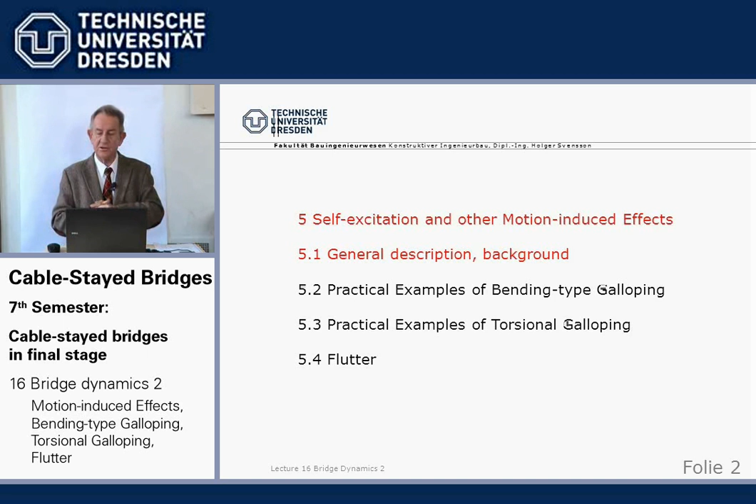Our third part of phenomena, which is the self-excitation or motion-induced effects. Again, we have this important table showing the three different. Now, the motion-induced, we have rhythmic motion of the body in the flow. It's together. The beam moves, acts together with the surrounding air. It's a combined system, air plus beam. That's the difference to the other two before.

And okay, it can be vertical and rotational. Rotational is very important here. And basically, we have the effect of self-excitation instability. And you may always remember that we have here something like a buckling problem in general statics. We have an Euler case 1 where we can have a sudden divergence, Verzweigungsproblem in here, which goes beyond limits and destroys the bridge.

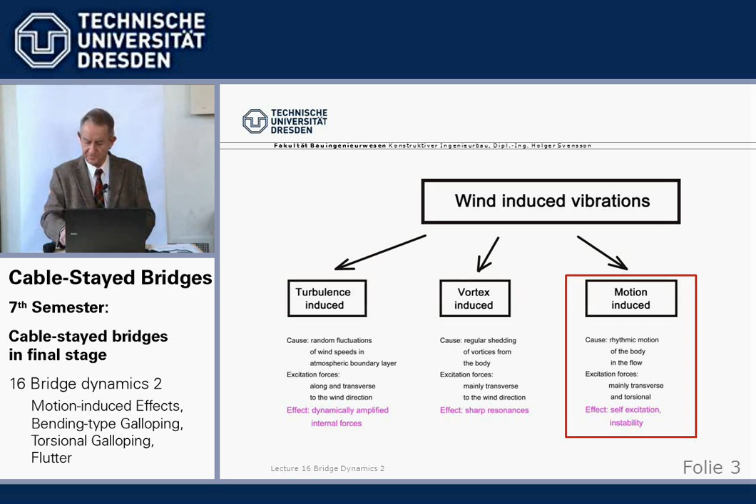This is the second, I would like to say, very important picture I'm showing you and trying to explain. Because here, I think in an excellent way, the different phenomena are explained. First of all, the interaction of the air with the beam changes certain characteristics of the beam. Now, the wind force may act as a torsional spring.

We can think of the surrounding air as a torsional spring, which with increasing wind speed changes the torsional eigenfrequency of the beam. If we have at wind speed 0 this torsional eigenfrequency, and the wind increases, and we have a cross-section which is sensitive, of course it depends on the cross-section, then the torsional frequency with increasing wind goes down, goes down. Here we start in a ratio, torsional frequency twice the bending frequency. You see? Bending, torsional. And we come to a point where they are identical.

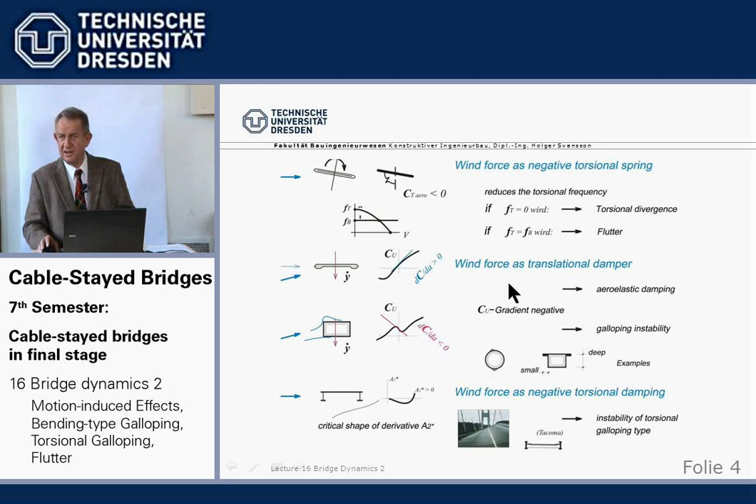Now, I mentioned already self-excitation or divergence on the dynamic behavior. We have here a similarity from buckling problem, suddenly a divergence, Verzweigungsproblem, or if we have an eccentric compression, then we don't have divergence, but we have nonlinear theory of second order increase of stresses. And we have the same here. Under constant laminar wind, in reality, we have a bifurcation, which is again another word for Verzweigung problem. Suddenly the movement goes beyond all limits.

Or if we have turbulent wind, not like beautiful and parallel, but like true wind is, then we don't have this divergence or bifurcation, but we just have secondary effects on section forces like buckling problem and stress problem. Instability, we have here the bifurcation problem in laminar wind and the secondary in turbulent wind.

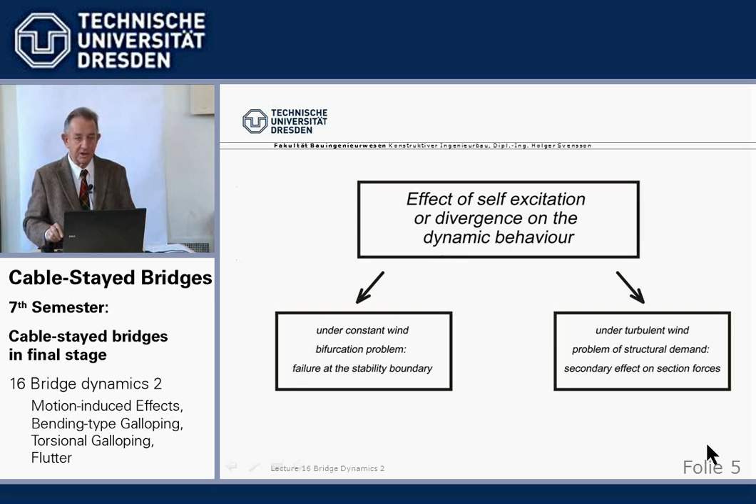It's always a question, of course, what is the required relation between wind on site and the onset wind speed for, say, flutter. This depends, the wind speed shown here depends on the angle of attack.

For horizontal wind, the wind speed in nature is biggest at roughly this angle, speaking very roughly. If the angle increases, the highest wind speed decreases. And in actual fact, the wind speed decreases faster than the critical wind speed for flutter. So we can rest assured, if we have safety here, it will not be worse for angles acting in general.

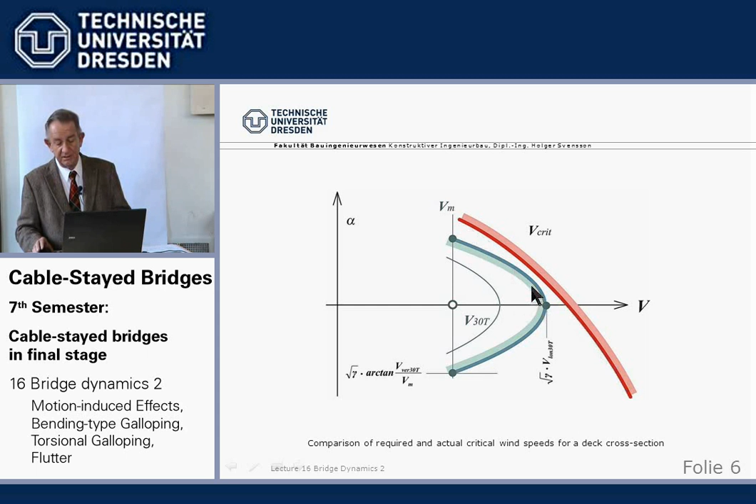Then naturally we have to multiply our certain wind speed. Normally we take the wind speed for oscillations in the wind with some ultimate factor. Normally for wind pressure we go by 1.5. Then the wind speed is the square root of 1.5, because the pressure goes with the square of the wind speed. So if that's the natural wind speed we take into account, at ultimate stage it's square root gamma times square root 1.5. This may be the onset for some flutter phenomenon, and it must be away from the ultimate wind speed.

Now we'd like to show some practical examples for bending type galloping. Galloping, you remember, was the transverse movement. If we add up the wind speed and the relative movement, we come to a drift, and we have here the negative branch in the change of the lift factor with angle of attack. That's always when we have that, we know already, aha, here we go, we have to look into galloping.

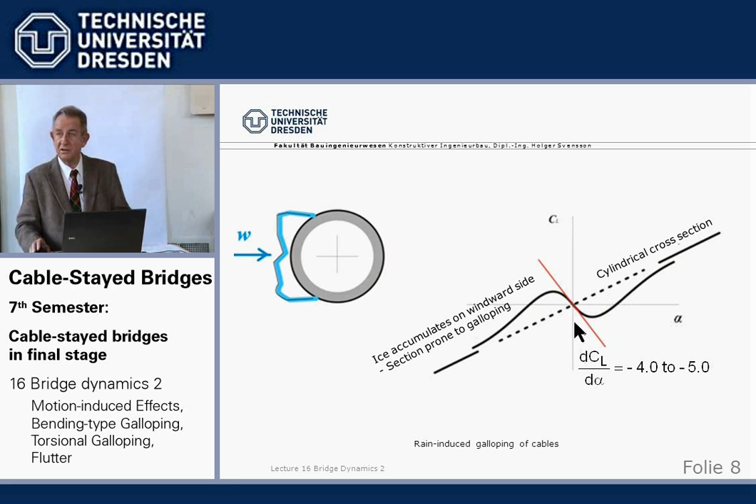That comes out of wind tunnel testing. It can happen with bridges, not only with cables. We had a bridge with an unfavorable cross-section, rather narrow but deep, an open cross-section with webs coming down. This was the wind speed in this case for the on-site condition we had to consider. Then in the wind tunnel we got this speed range for the onset of galloping. Galloping is also a stability case, goes beyond all limits. So, no good, couldn't build the bridge.

So in this case, Kovacs found out that if he placed a damper between the bridge beam and tower, this damper was enough to increase the required speed for this galloping phenomenon from here to there, and we had sufficient safety. So not only the stay cables can show galloping phenomena, also a beam, especially if it's narrow and deep and has no bottom slab, is open.

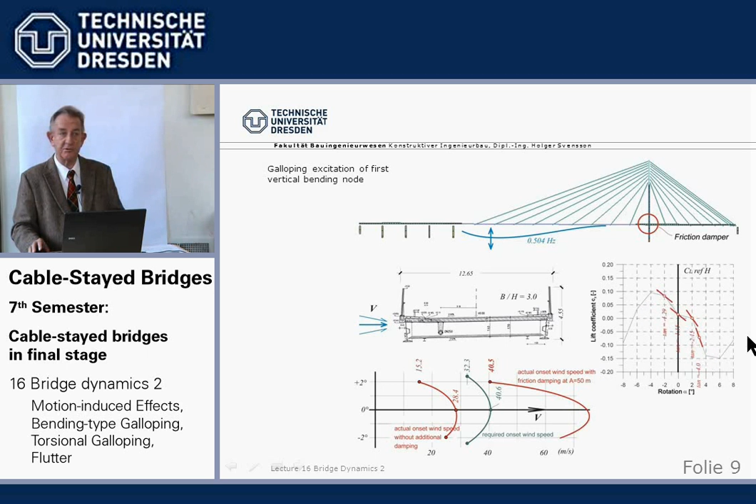And here again we have this change of lift with the angle, we see here from the wind tunnel. When that came out, everybody said, aha, here we go. Now, what shall we do to get the bridge stable?

But cantilevers are important, and we must think about the traffic band. And I'll give you a hint. We had a problem once with the traffic band of a railway. If you have a long railway, and say the motor may break down in the middle of the bridge, it stands there, and then you have a problem. Zárate-Brazo Largo bridges, well, I can't go into here, but I'll just tell you it's not only the cross-section. We must consider the traffic band on it, and how long it is there - it's all probability calculations.

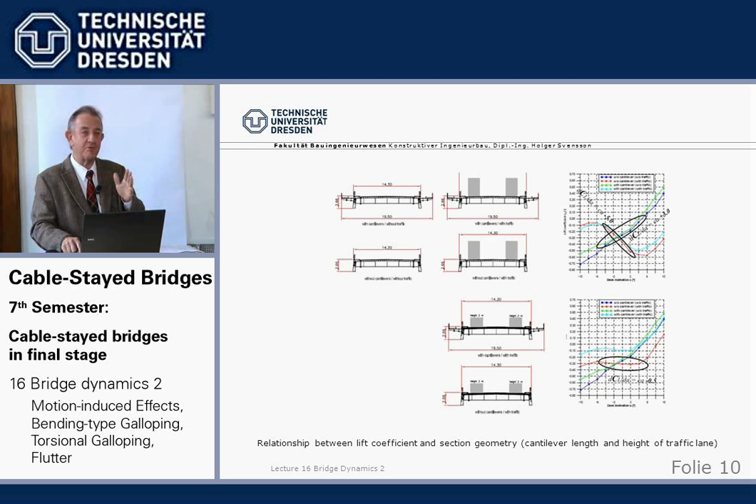Okay, we can also have galloping phenomena at the tower. We have here the example of the second Panama Bridge. You may remember I've shown it. This is a cross-section of a tower leg, the wind blowing, and here we have our diagram, lift factor versus angle. You know already and say, here we go. What shall we do now?

Now, we could build the bridge as it was designed because the eigendamping of the concrete was just enough to suppress this system which showed up for an undampened cross-section in the wind tunnel. So there we didn't have to do anything.

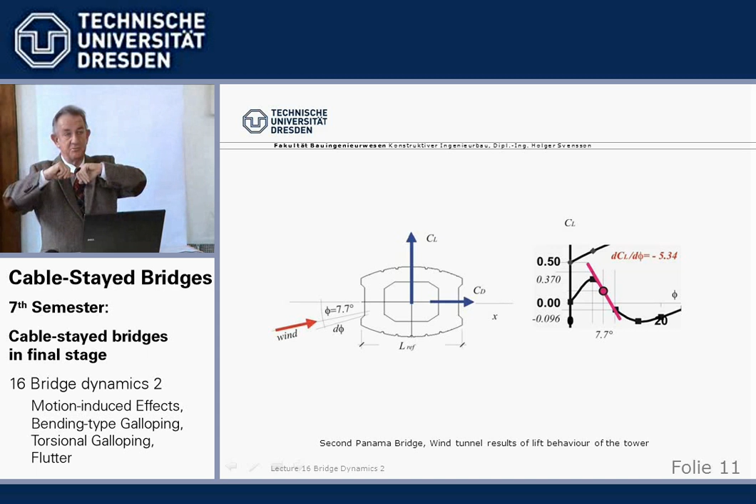There are other examples, Vladivostok, Golden Ears Bridge, where this didn't work - steel towers, low internal damping. There we had to put tuned mass dampers into the tower legs. This can also happen with the towers.

Okay, now we come to torsional galloping.

Torsional galloping - you may remember the frequency and damping are changed - as shown here for this bridge, a true bridge, Tingkau in Hong Kong, is very much dependent on the edge configuration of the beam. And I tell you straight, it's not completely understood why this is so.

We can just state what shows up in the wind tunnel. Look at these two cross-sections. The only difference is that here we have a short cantilever with a short fascia of 0.5 meter depth, and here basically the same, but a 1 meter deep fascia. Whereas here the critical wind speed was 67 meters per second, this was 92 - that's 50% more. And I wouldn't dare to tell you that was easy to foresee.

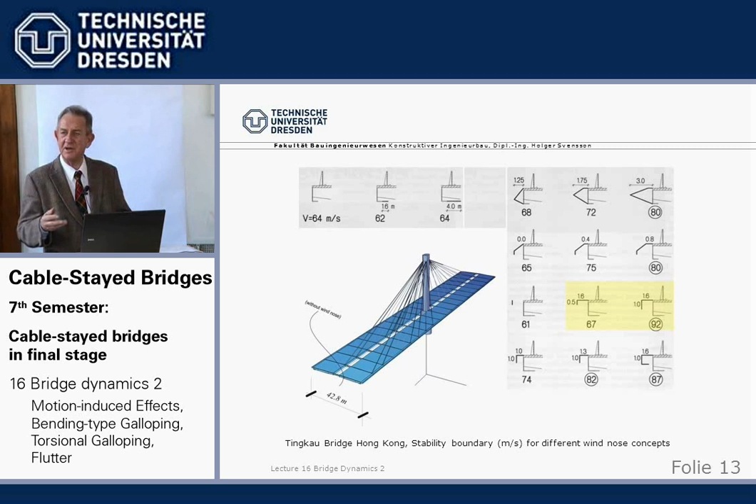It must be like that - no, we just have to go into the wind tunnel and look into these. This wind nose, which was investigated, gave only 68 meters per second critical wind, whereas this little fiddle here gave us 92. There are things in aerodynamics which are still not known, so we use wind tunnel tests and vary the edge configuration, hoping we hit the good one, but it's not completely known and understood mathematically why this happens. You can simulate it in a computer, but the deeper reason behind it, we just don't know.

Now, a very interesting example is the pedestrian bridge across the Rhine River, Strasbourg-Kehl. We have here 183 meters. It's a true Rhine River bridge as a pedestrian bridge, which is very unusual for us. We were very daring to do that. It's a very light bridge. It worked - got the German Bridge Prize for that and all. And it has two superstructures.

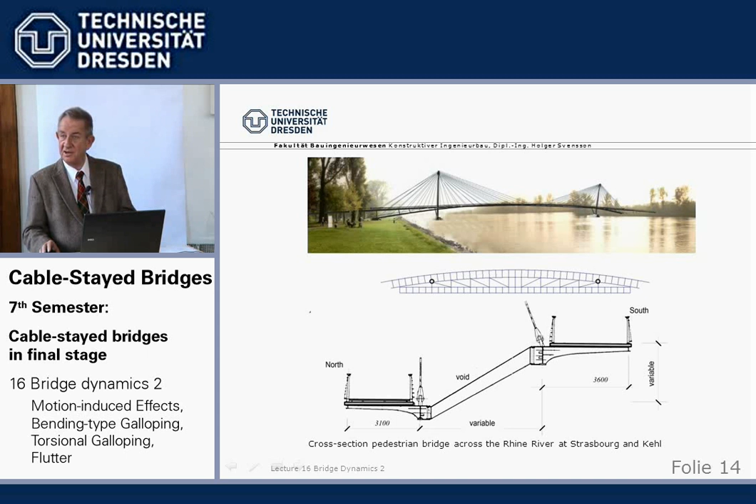One from here up, down, connecting the river walks close to the water, say in summer. But if we have high water, then we need also a connection from the top of the levees on both sides. So there are two separate cross-sections, more an arch type and a higher one, meeting in the middle - the lower one and the upper one if we take a section here, and we have a void. All very light, only pedestrian loads, steel cross-section.

It's a very light bridge. And then we have an interesting phenomenon. For a certain wind speed, and the torsional mode of the structure of 0.65, we have the phenomenon that the wind comes from here and forms a vortex - it's an obstruction in the wind here. For this given wind speed, the length of the wave changes with wind speed, and for a wind speed of 13.5 meters per second, we just have the wind attaching here, going through and reattaching at the second beam, which gives us a torsional impact.

If we go again into our diagrams - I can't help it, you must try to understand them sometime - we have here a speed of 13.5 meters, that's the torsional frequency of 0.65, and then we are just at the internal structural damping of 0.04. That's just eaten up. Steel has less eigendamping than concrete, but still it's there, 0.04. This hitting here acts like a negative damping from the air. So at this point the eigendamping is just eaten up, and there is negative damping from this interaction of the wind with the beam.

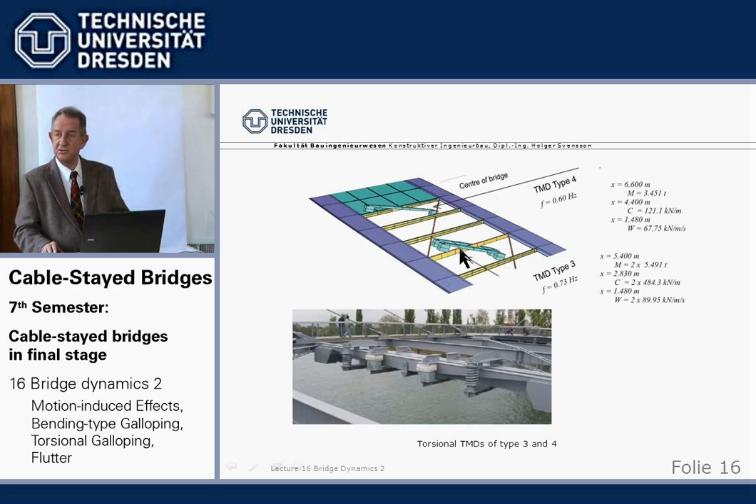There were two - I just call them like seesaws. If kids play and sit on a seesaw or swing and go up and down, that's the type of tuned mass damper against torsion, like a seesaw, with the proper weight and friction and so on. With this arrangement, the bridge could be made stable. However, it is rather complicated, this type.

So we said, or Kovacs said, what happens if these seesaws do not work as considered? Does the bridge then come down? We cannot accept that possibility - whatever happens, the bridge must remain stable. There may be movement or so, but it must not come down. So it was considered that one tuned mass damper is stuck, doesn't work at all, and the other one is out of tune by 10%.

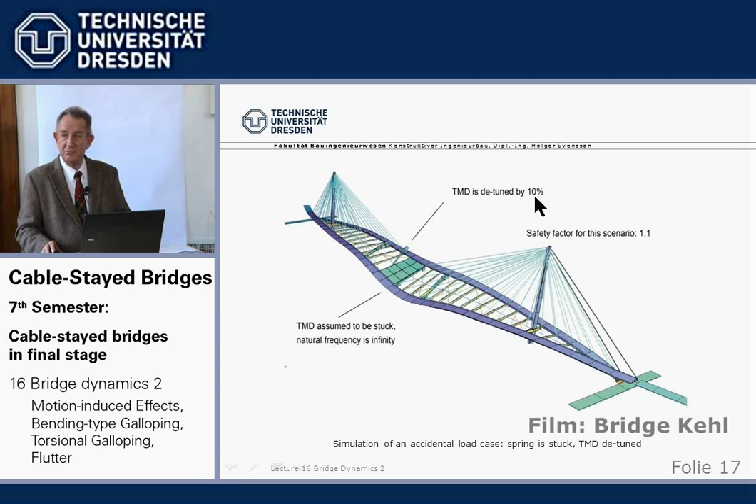Now, what happens then with the bridge? Mr. Depe will show us. Kovacs had the thing running in a time history, with these out of tune - one not working at all and the other out of tune - and the result was, exaggerated here in the film movements, but still within the acceptable range. So even if these dampers do not work as expected, the bridge will not come down. And that's what we have to ascertain if we go into more sophisticated damper things and so on. What happens if it doesn't work? If it's not inspected properly and things like that.

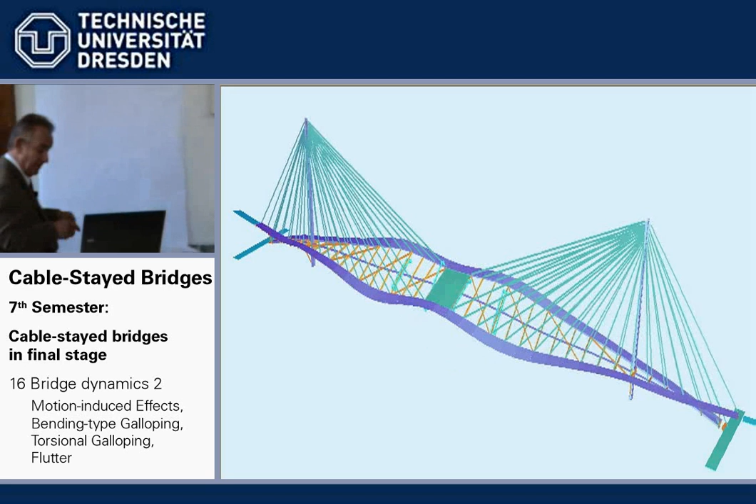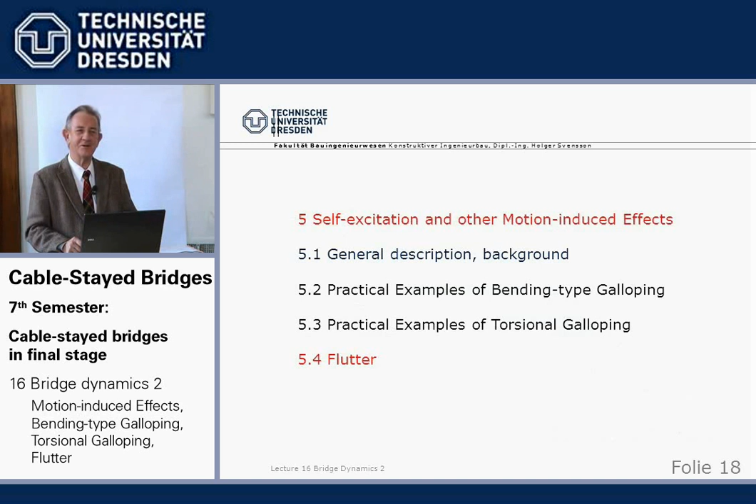Now we come to maybe the best known phenomenon, flutter. Tacoma is often said to be flutter. It's not, but that's a very fine point. It's of course very well known because we can calculate it rather easily with the help of the Kloppel-Thiele method.

Now, what is flutter? I would like that you try to understand that. That's not just some mathematics, long formula where you put some figures in. But what is the phenomenon? And it is easy to understand. I try at least to explain it to you.

I mentioned it in the big overview, and I repeat it now. We have here the wind speed, and we have here the bending vertical movement frequency, and we have the torsional frequency. For no wind, the torsional is rather big, say about 2 times the bending, typical for a bridge, and if the wind blows with small, reasonable speed, nothing happens. However, if we have a real cross-section - not the calculation made for an airfoil flat plate, but a reality cross-section - then we have the wind acting as a torsional spring, reducing, with increasing wind speed, the torsional frequency.

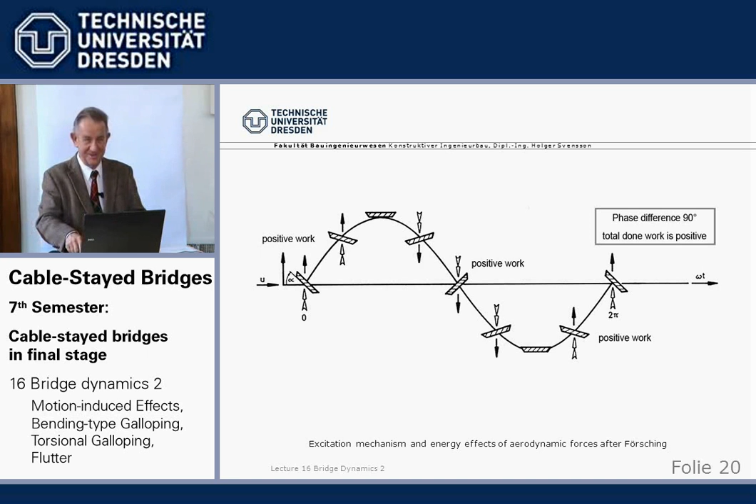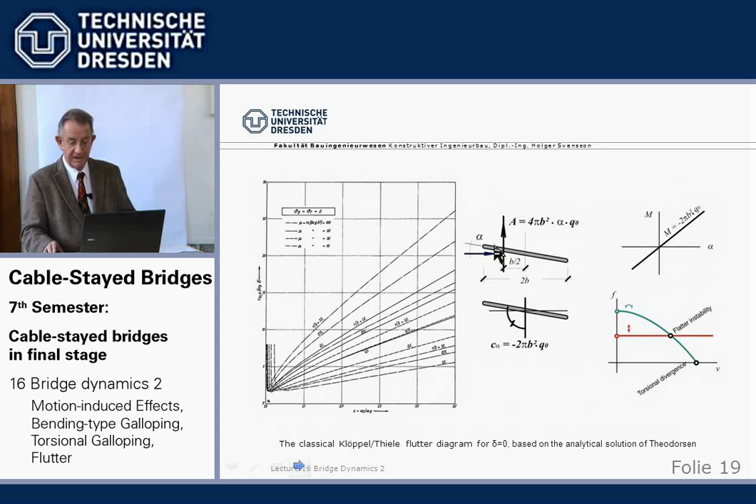Okay, now, Klöppel-Thiele initially goes with double interpolation and all sorts of things. However, one could simplify the whole thing, and so it's fairly easy these days to calculate the critical wind speed, and it depends on the beam. Basically, it's the beam width and beam bending frequency. There's the ratio of the frequencies, and of course there is some mass and so on in it. But all this would give the critical wind speed for the onset of flutter for a given ratio, for this type of airfoil.

Now, in reality, we have a real bridge beam, and there is a reduction for a real bluff bridge beam, which has some shape instead of a flat slab, even if the bridge beam has the same frequencies and mass distribution and so on, and that's given in a reduction factor eta.

Klöppel-Thiele had evaluated a great number of wind tunnel tests, shown in several diagrams in the publication, where for a given ratio of torsion to bending, normally between 2 and 3, for certain shapes. Mr. Thiele had calculated the theoretical flutter wind speed, and then they compared that with the flutter wind speed in the wind tunnel for this cross-section. Without fail, that was lower, and so they tabulated that in this range.

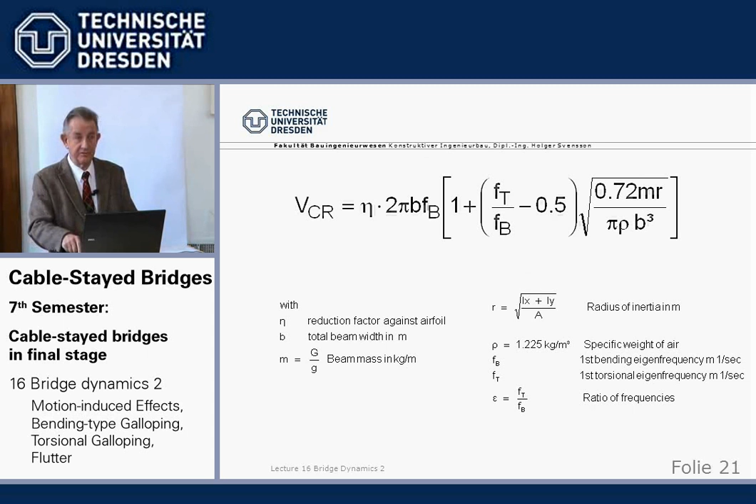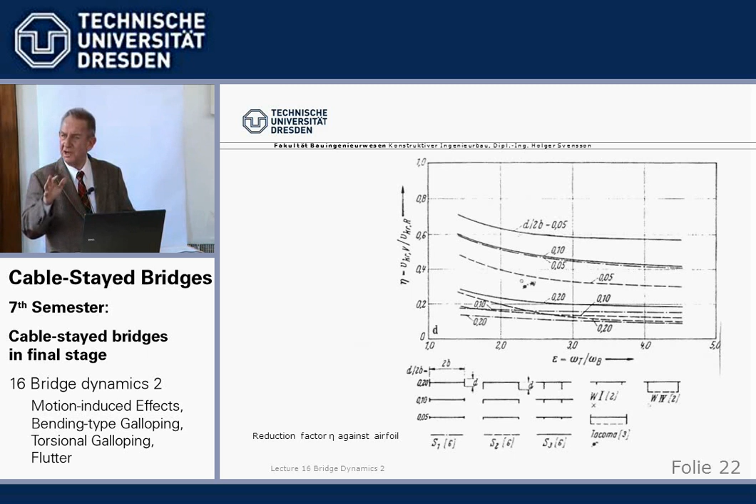So flutter, you remember here this blowing up and down. Thank God Klöppel-Thiele found a method, a simple way to put it in, and it gives you a rather good result. With all the high tech computer methods, Klöppel-Thiele still is okay. The eta factor, the reduction factor, is a little bit off, but otherwise it's well known.

Now in Incheon, we had the problem that for the original cross-section, very bluff, the onset wind speed for flutter was too low. Incheon is a big bridge in Korea. This was required, and with a change of the wind nose here, it was made okay. But mainly I wanted to show you with this film that today, we can use the wind tunnel for getting the cross-sectional characteristics and then put that into the analytic computer investigation to go on.

We can even omit the wind tunnel and try to get the results from, say, a finite element method with a computer. It's still not 100%. I still prefer to have it checked in the wind tunnel, but it's helpful to see what edge configuration may be helpful and so on.

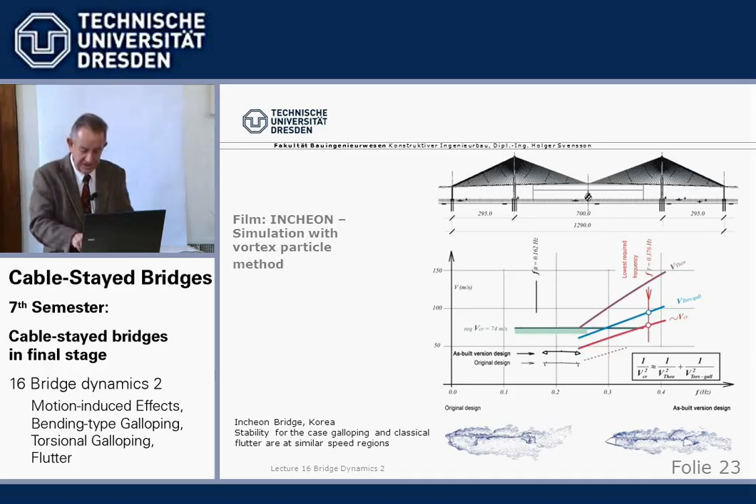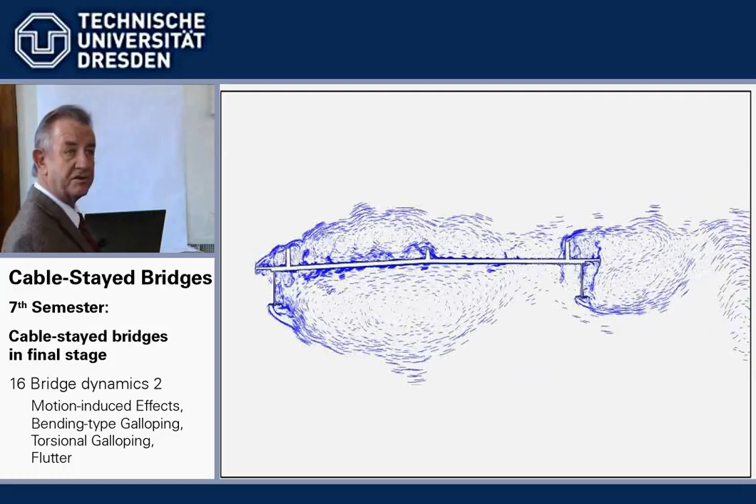Now, let's see how the airflow is, say, with a sort of finite element analytical method. You see? That's how the bluff initial section had visualized the flow of forces, and of course all the factors and dynamic behavior was taken out there. This is possible, we've done it, but again, sometimes it's still better to have a small model in the wind tunnel to check what comes out. But this is purely theoretical.

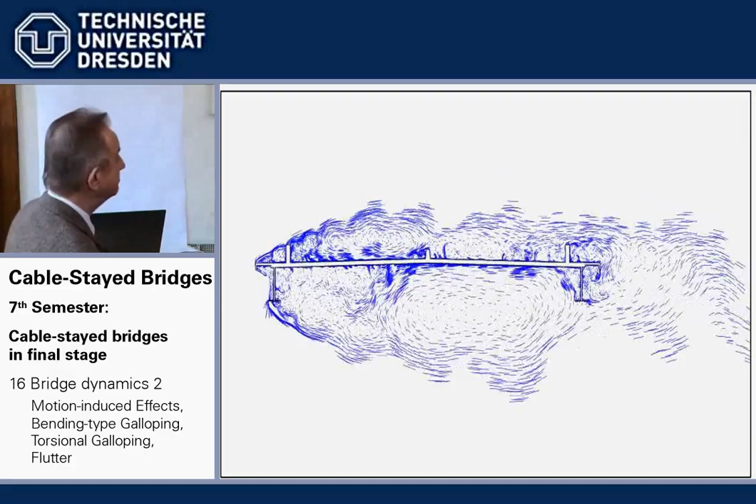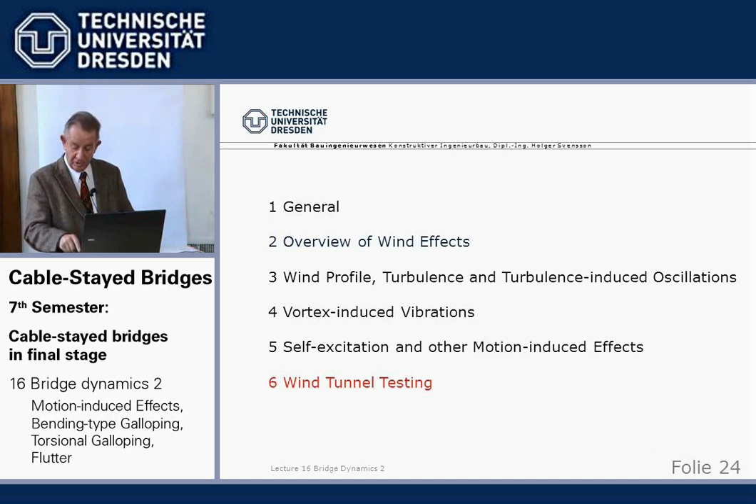There are also wind tunnels these days 40 meters long, in Denmark, in Lyngby, done for the Great Belt Bridge, and there's one in Japan done for Akashi Bridge, something like 40 meters. People put in a full model there. And I always think that's more for show, because the scale is so different that you cannot get any aerodynamic similarity. It's normally required by clients who don't understand the aerodynamics.

And what the aerodynamic people explain to you, like I do today, for a bridge, they say, well, he can tell us a lot, let's put it into the wind tunnel. And then it's tuned the way that it comes out right, and everybody's happy. But the scale is too different from reality. That's why section models, in this part of the bridge beam, at least the length 6 times the depth or something like that, that's fine. But not the full models.

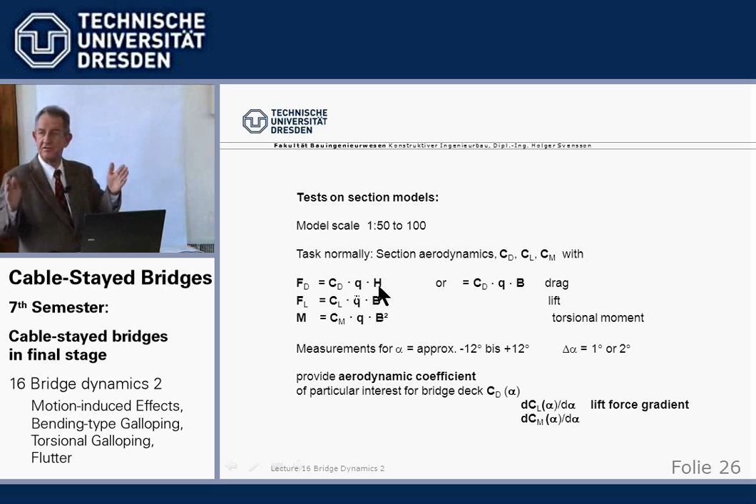We've shown it briefly, but basically we have here the plus minus 12 degrees, and here the drag factors, and we normally calculate it by C, you can do it as you like, the C times the wind pressure, either times the depth or the width. You have to look carefully what is referred to. Somebody refers it to the depth, others always refer it to the width. It's a factor of 10 or so. You'll find out pretty soon if you made a mistake there.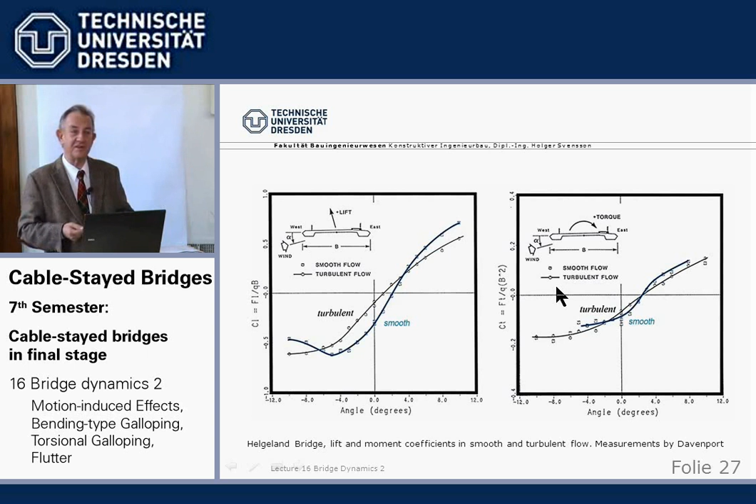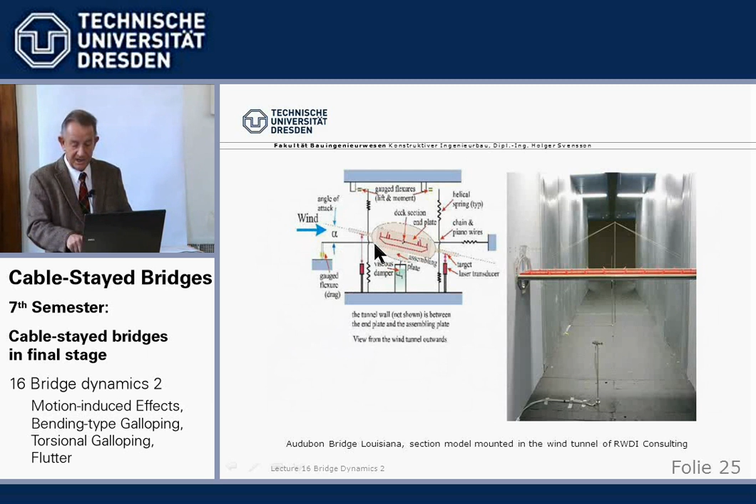Here I have the printout again from a wind tunnel test. I just show you, we have this model here, and we let the wind blow and we measure the forces or the movements. Here we have measured the movements, increasing wind speed, and here the movement. As I said, suddenly at low wind speeds we have some, okay, you would know, no problem, that's vortex shedding, probably doesn't occur, don't worry about it, I've told you. But it shows up first, and it's in the wind tunnel report, and everybody may get excited. Well, it's not so bad. Then you go on, very little happens, and suddenly it explodes. And then you have reached flutter.

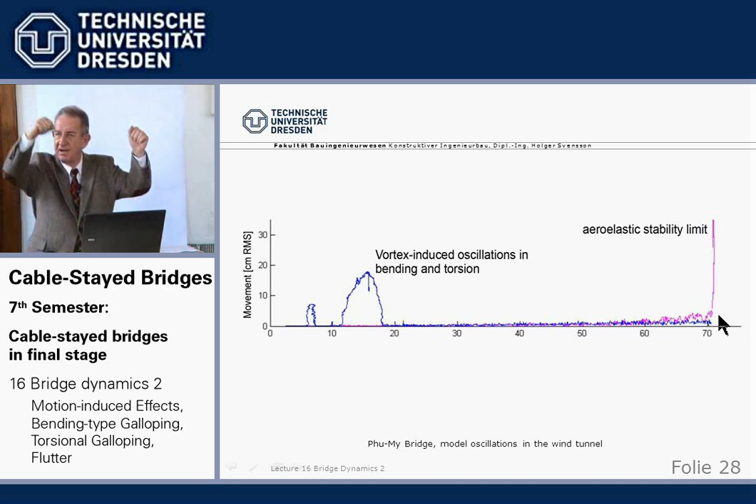That is the difference. This is maybe significant movement, but it's limited. You may let the wind blow here at this station for a longer time. There may be lock-in and all sorts of things, but it will normally remain within limit. Here, however, when you hit the flutter, it's like a buckling effect. Suddenly you have a divergence, the thing explodes. And then all these wind tunnel people, they run and try to save their model, because if they don't hold it, the thing really explodes. And they want to save their beautiful handiwork. I've seen it.

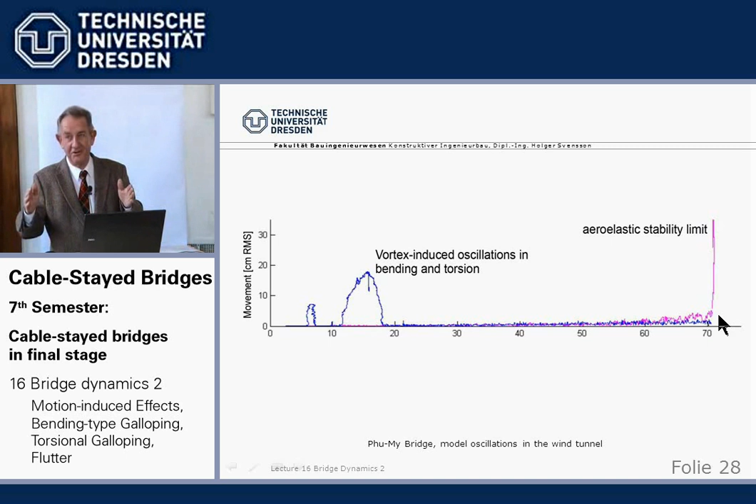And they increase the wind speed initially very slowly until they know where the thing really starts. We can also put, say, towers into the wind tunnel to find out the wind loading. Normally what we do is we measure the moment here and then can calculate back what the wind load is and so on. Now, you may say, why that? We know DIN 1055 gives us longitudinal wind, drag factor of 2, I say, and some shading, and this way we know all about it.

Yes, but we don't know what happens with the wind in between 0 and 90 degrees. Quartering wind, 45 degrees is one thing, but there may be an even worse situation with some 15 degrees, whereas when you have transverse wind, the code for this tower tells you nothing happens with the second leg, it's in the shade of the first. But what happens if you have 15-degree wind? Then it's in there, and that may be governing.

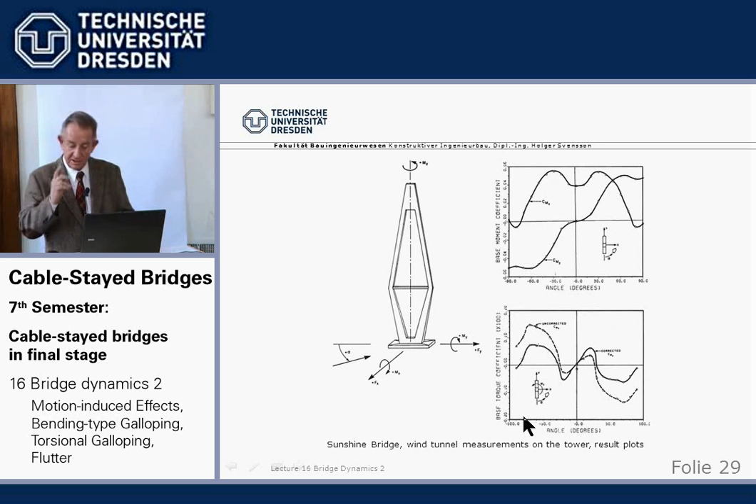That's why for the Sunshine Bridge we used this model, rotated it through the wind, and got out the base moment readings and could calculate. And in actual fact, the biggest loads were not at 0, but at some angles in between. Just be careful there, don't trust the codes, they make it rather simple. For small bridges it doesn't matter, but for big ones you have to be careful.

Now, wind tunnel tests, I mentioned it before.

We use partial models, section models, in the wind tunnel to get out the characteristics - lift, drag, and moment - which are unique to this cross-section. It's different for every cross-section. I showed you how sensitive it is to small changes there. You can change all that. But there you are on safe ground. The scale difference is not so big, and we have at least 50 years of experience. We are on safe ground. We know when we use these wind tunnel results it works.

Now, when we come to the full bridge, there, today, we use the mathematical or computer analytical model. We use as input the wind tunnel test results, but to go on with them to find out what it does to the complete bridge, that we do on an analytical model. We do not try to put a full bridge model, even if it's 40 meters long, into the wind tunnel, because the difference in scale - Reynolds, Froude, I'm not going to tell you all these things - which are important there, we just cannot do.

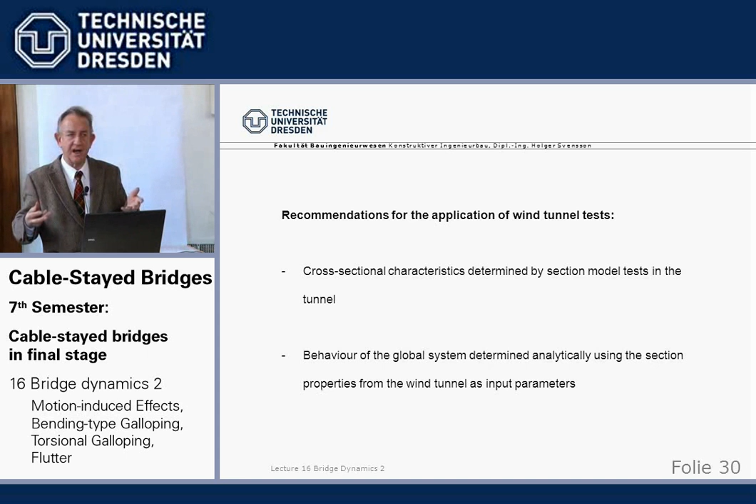It's always a compromise. In the analytical model, as I've shown you for Helgeland Bridge, where Kovacs developed that part of it for the first time, we can not only have the scale effects omitted, but we can go to nonlinear behavior. We can formulate that for a certain situation we check the beam, see it is cracked. When it is cracked, we can reduce the stiffness, have a changed eigenfrequency, run the thing again, and so on. We can iterate even nonlinear effects in the beam and otherwise. So it's the best we have: section model to take out the section properties, analytical model to find out the behavior of the full bridge.

Okay, to sum it up - you should know this diagram by heart already. I've told you about the three most important aerodynamic phenomena, or wind-induced vibrations.

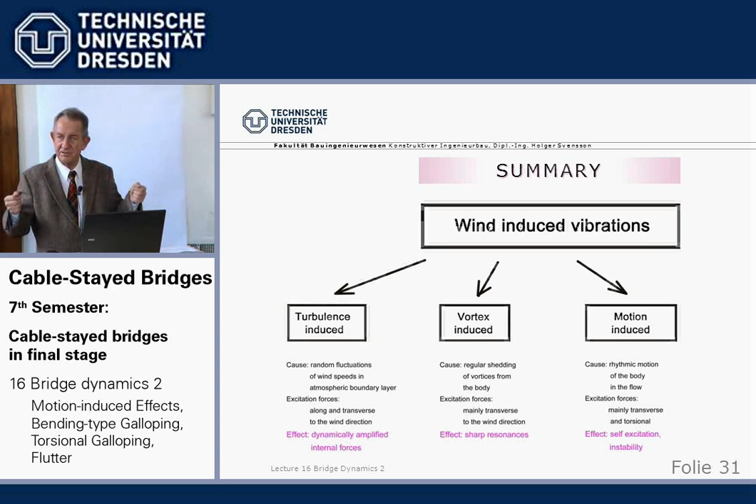Number one is turbulence-induced. There we just have the bridge with a very smooth, nice cross-section in the wind, and the wind hits it with different gusts. We had that for the Helgeland Bridge - you may recall, a very slender bridge in a very strong wind climate, Norway at the polar circle. There we had very strong winds, and a mountain range called the Seven Sisters, from where the wind predominantly came, which gave us a turbulence of 25%, which is a hell of a lot. Otherwise you get 5 to 10. So we had high wind speed, 270 kilometers per hour as our design wind speed, plus 25% turbulence. And the governing loading for this bridge was turbulence. So if you have a real bad wind climate, it's not always the flutter phenomena - it can be just simply the wind blowing against the bridge with gusts.

Then we have vortex shedding: behind a bluff body, vortices form and shed with a frequency, the Strouhal number. If the frequency coincides with the eigenfrequency of the beam, we are in resonance, and the small forces which occur as the vortex goes up and down just add up, so it becomes more of a statical problem. We have movement there. However, what shows up beautifully in wind tunnels very often does not show up in reality, because the wind is more or less turbulent. The lengths where the vortices attach or detach from the beam are different, and so on. So very often in reality the wind is too turbulent to give the phenomenon which we see in the wind tunnel.